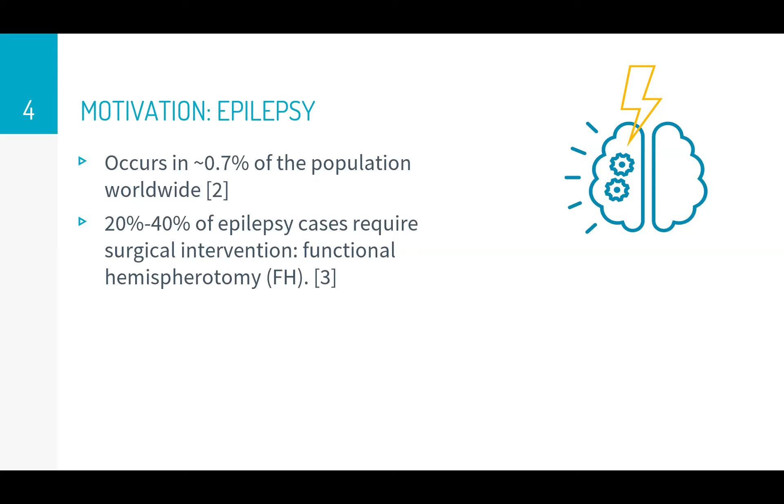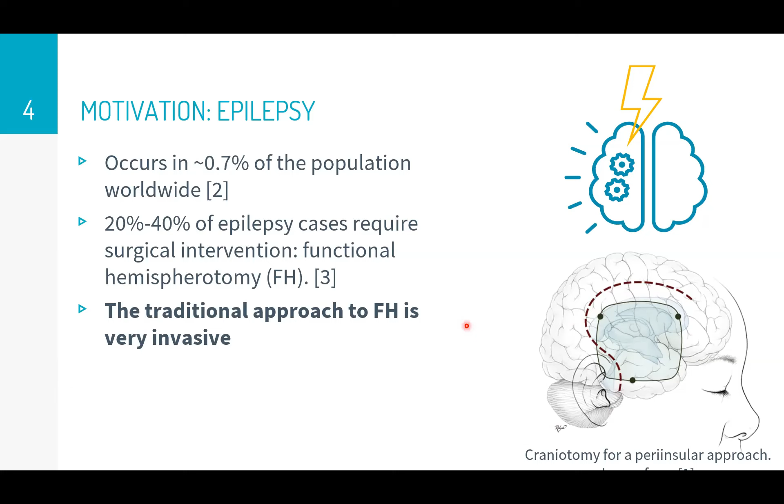The reason why it's so invasive is that this FH procedure involves the disconnection of the two halves of the brain, so you have to cut the brain in a lot of different places. It's somewhat illustrated on the right here. This isn't actually what it would look like when it's done, but this is sort of an exaggerated view, an artist's rendering, to show you where the disconnections are happening in the brain. You have to do quite a few cuts over a large volume within the brain. It's quite a complex procedure, and that's why it has a relatively high level of invasiveness.

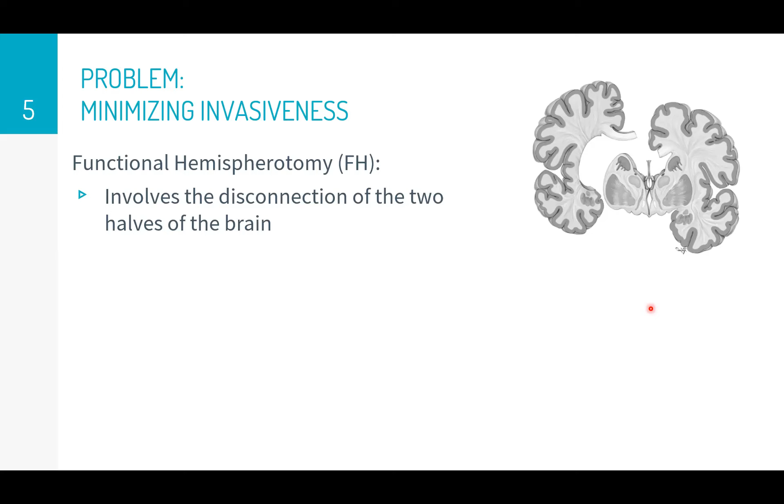Further complicating this problem is that the patients are often young children, less than 5 years old. The reason for that is that these procedures are more effective generally the younger the patient is. It tends to be safer and result in less seizure recurrence after the procedure for younger people, and improved outcomes cognitively as well. Because of this, there can sometimes be cases where the patients have multiple comorbidities, or additional complications. This was one case that was taken from a paper that I was reading a while back.

And to try to reduce the invasiveness of the procedure, instead of cutting that large window, they did the procedure with lasers. With that, they were able to only burr several holes in the patient's skull, but it was still quite invasive. And you can see that this is a very young child that they're performing this procedure on.

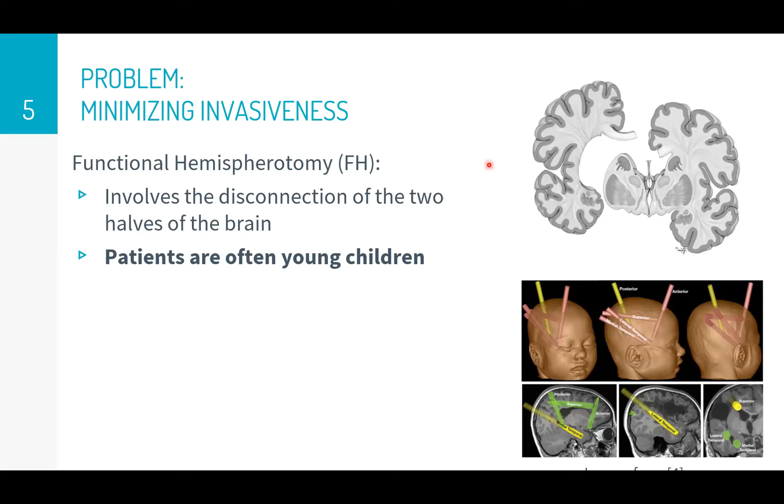So we want to minimize the invasiveness, because generally speaking, less invasive procedures are safer. They require less time for patients to recover afterwards. So if we want to do that, a minimally invasive approach is going to need a few things.

It's going to need distal force sensing, so sensing at the tip. Some methods of hemostasis, which is dealing with potential bleeds. And most importantly for this presentation is smaller, more maneuverable tools than what currently exists. I think that really those tools have to be robot tools for the kind of maneuverability that we're looking for.

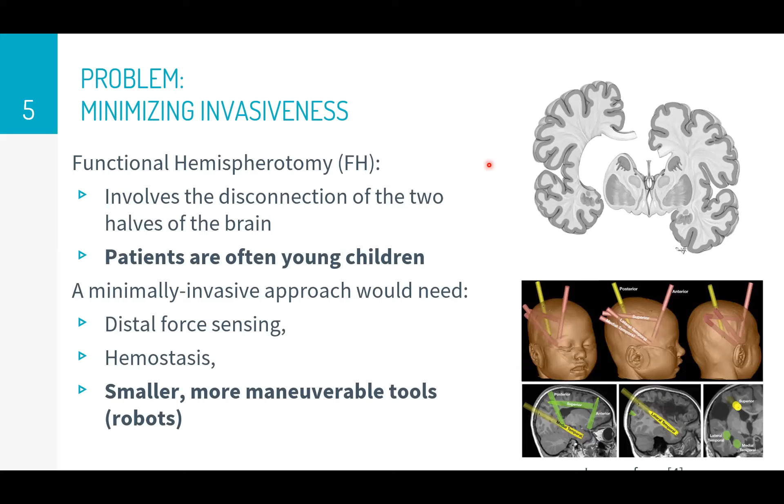So when we look at existing actuation methods for surgical tools, the most common one, which is in use right now, is cable pulley systems like the DaVinci robot. That's a very common surgical robot that exists right now. I have an image of their tools on the right here, and you can see that there are these wires that wind around pulleys. By pulling on these cables, you actuate the tool by pulling on the cables around the pulleys.

And it has some disadvantages associated with it. I won't get into all the details on that.

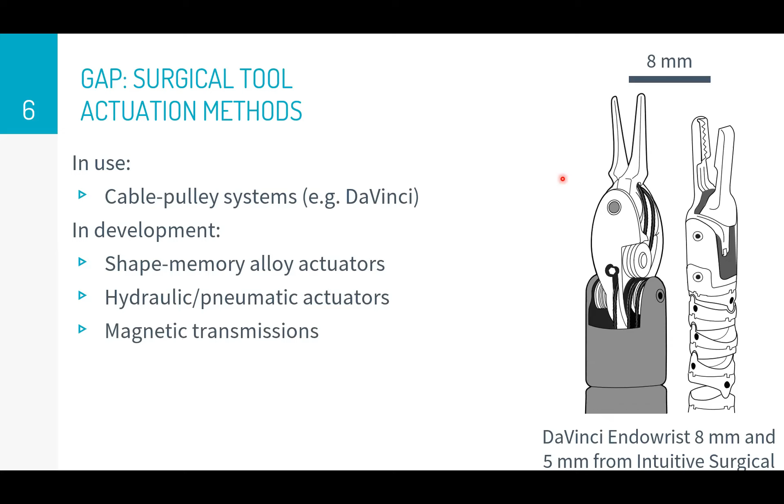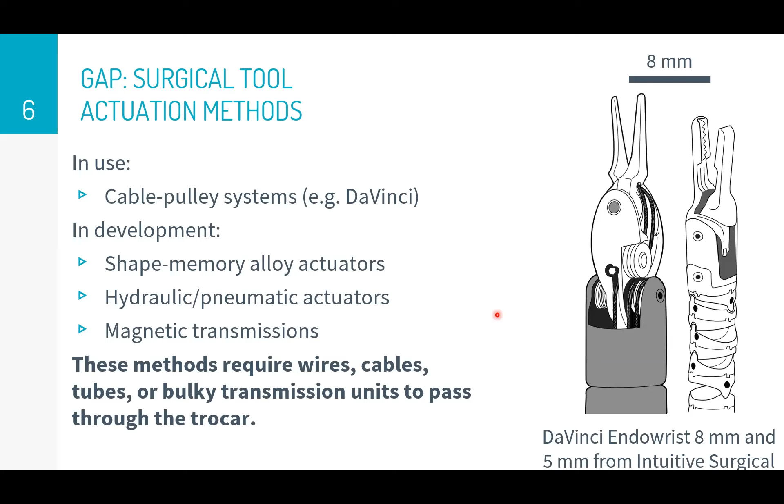There are other potential actuation methods in development. Some groups are working on shape memory alloy actuators, hydraulic, pneumatic actuators, these magnetic transmissions. But what all of these actuation methods have in common is that they require wires, cables, tubes, or some kind of bulky transmission unit to pass through the trocar, which is the entry to the patient. So we want to keep that entry as small as possible.

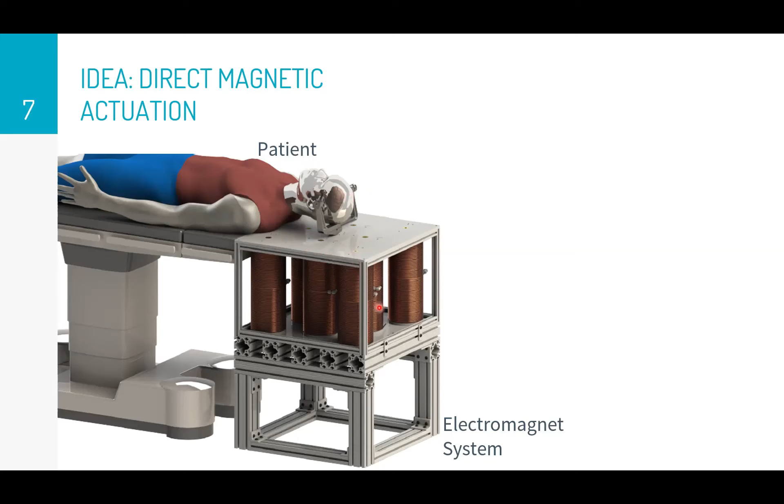And what this would look like is you'd have a patient lying on a table, and underneath the table, you would have a system of electromagnets that project a low frequency magnetic field into the surgical workspace. Then within the patient's skull, you would maneuver some sort of wristed tool. So you'd have maybe a concentric tube arm or some sort of robot arm that maneuvers its way into the skull.

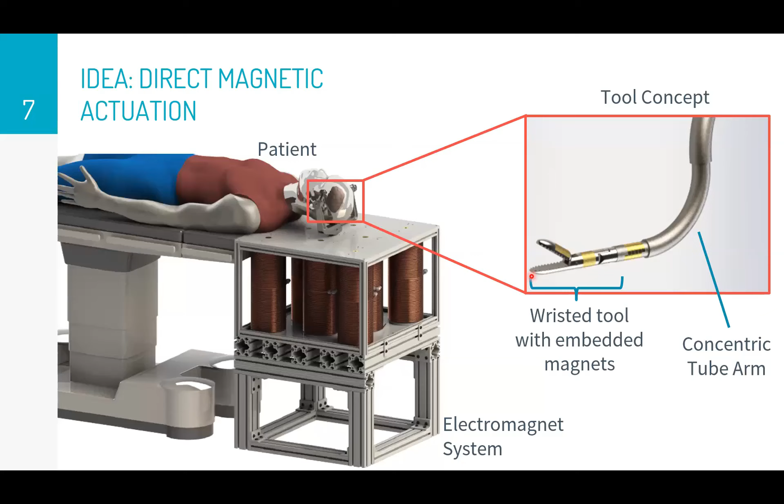And then it would have this wristed tool at the end. The tool would have embedded magnets inside. Those magnets would respond to the magnetic field so that we can use the magnetic field to control the configuration of the tool. That's the basic idea behind our approach. And so that would look something like this.

And what's particularly unique about this approach is that because it's wireless transmission of forces to the robot, we don't need to run signal lines or any sort of mechanical transmission to the tools. So that saves a lot of room for other systems.

And you can see with this robot concept that there are in a surgical robot a lot of different systems that need to be included in the robot, such as lighting, vision, irrigation. Irrigation means you have some cleaning solution, like a saline solution, because surgery can get messy and you need to clean things off to see properly.

You would have some arms for maneuvering the tools, maybe sensors for determining collisions. So with all of those systems needed for a successful robot, you don't really have much room left for transmission lines for the tools themselves. So we're going to take away the transmission lines and do wireless tools. That's the idea behind our system.

We did develop some previous tool designs, and these were really neat. But they didn't look much like surgical tools. They were a little bit flimsy. We actually made them by welding together nitinol, which is a nickel titanium alloy, with different wires and parts. I won't get into all the details, but it was a previous work that a previous master's student did in our lab.

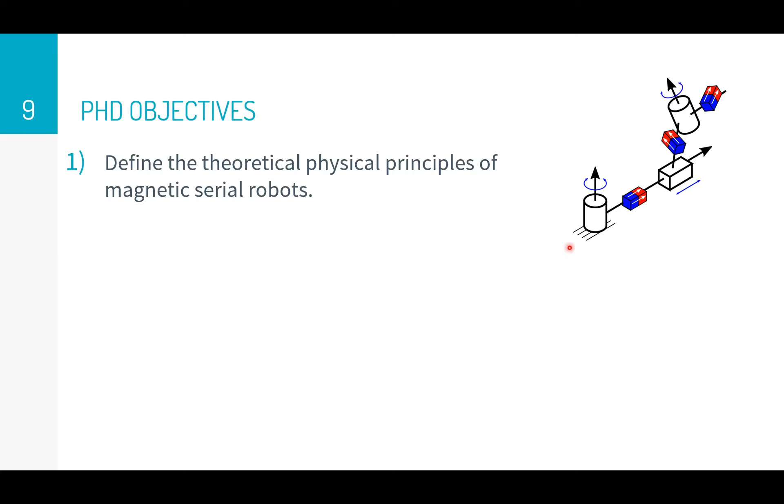So that would be about creating this theoretical interpretation, a model of the devices. And then the second objective is to go from the model to a real tool design, to evaluate the feasibility of this approach, these magnetic serial robots, for our intended application, which is minimally invasive neurosurgery. And we came up with some basic design criteria for that.

The tools would need to fit through a 2mm diameter hole, because ideally this endoscope would be no larger than 10 millimeters, so we could have a very small burr hole to enter into the patient's skull. It would be at least 100 millinewtons of force, which we determined reading literature on the kinds of forces exerted during neurosurgery. And it would have to be some sort of articulated wrist. It can't just be a straight wrist that just has an opening and closing tool. It needs to have some articulation to it.

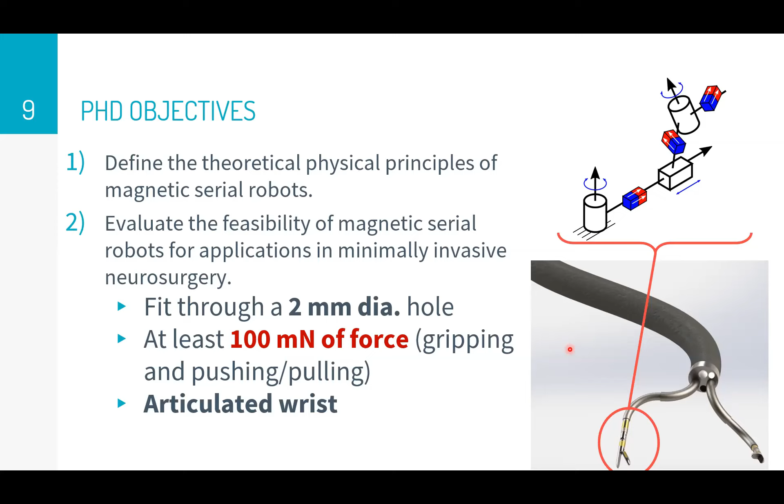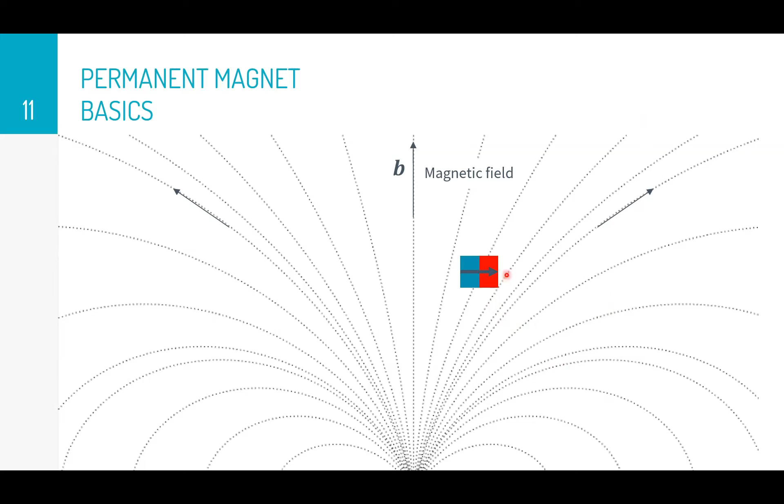So we have some field projected into the workspace, and in that field we have some permanent magnet. We can make some assumptions that allow us to represent that magnet as a single vector quantity, which we call a magnetic dipole, M. The energy of this system is negative M dot B, the dot product between M and B. As you understand, for any physical system, it's going to tend to try to minimize its energy. It's going to have some energy gradients that cause forces and torques on the system to try to bring the system to its minimum energy state.

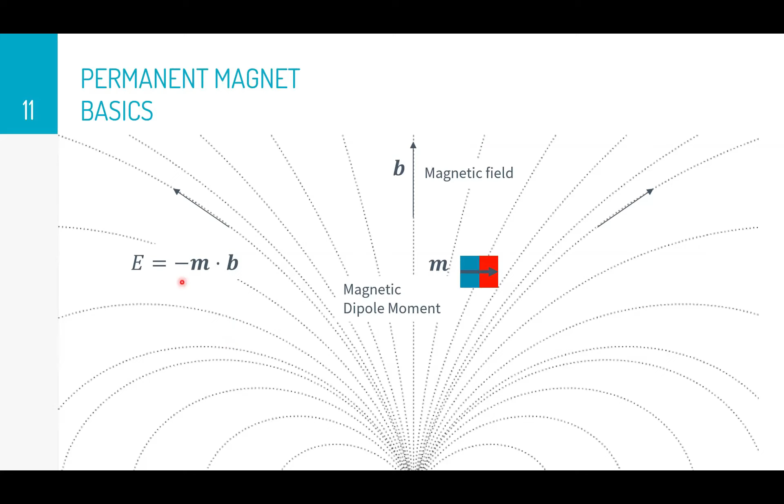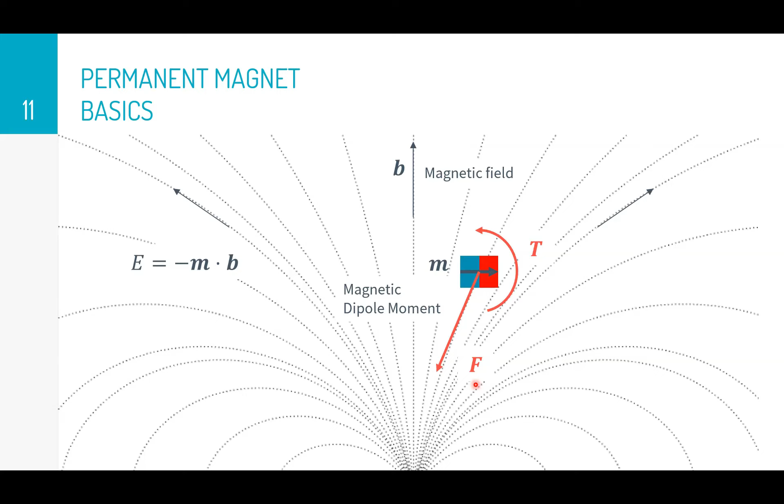So what that means is that because we have this negative here, it's actually maximizing the dot product. And the dot product is maximized when the torque causes our magnet to align with the direction of the field, so that M and B are parallel, and a force that draws M towards regions of higher B, because the larger B is, the lower the energy of the system. So if we can control the magnetic field, both the shape of the field, where it's dense and where it's more open, and also the direction of the field at a given point, then we can control the torque and force on the magnet and use that to do more complicated maneuvers with magnets. This is something that's been done in small-scale robots for decades now, but this is a new application and a new scale that we're looking at.

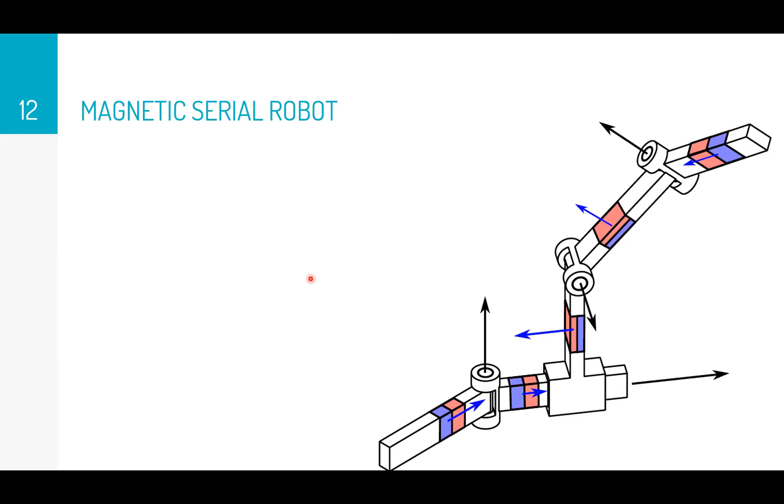So let's take that idea and apply it to something a bit more complicated. This is a concept rendering of a magnetic serial robot, which is a serial mechanism, and maybe it has some revolving joints, some sliding joints. In this particular example, it has 4 links plus a base link that might be connected to ground or some other object. We can use standard conventions in robotics to define the axis of motion of each of those joints, usually indicated by a K hat or Z hat, depending on what you prefer. So each of these joints is going to have some joint axis.

And then each of those axes is going to have what is called a generalized coordinate associated with it. So for a revolving joint, that generalized coordinate is going to be an angle, theta. For a sliding joint, that would be a joint position, D. And this is all standard for any serial robot.

What's new for this particular kind of robot is that in each link, we have some embedded magnetic material that could have some orientation in the link. It's fixed, but some designed orientation. And those magnets, there's going to be one in each link.

And that is how we control the robot. So unlike in a conventional robot where there would be a motor at each joint, we have these magnets instead. We need to figure out, there's two questions. One is, if we're given a robot like this, and we know the orientations of all the magnets, how do we apply a torque to each of those joints to get the configuration that we want? That's one question you can ask.

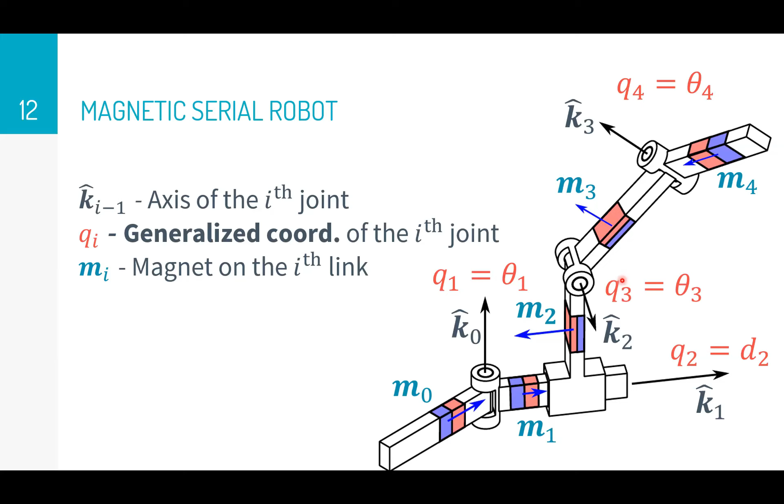And then the harder question is, given some kinematic skeleton of a robot, what should the orientations of the magnets be to have the best design that can be fully actuated and apply the most force? What's the optimal design, or even just what is a good design for that robot? And that's what I'm trying to answer with my PhD.

So in order to do that, we need a dynamic model. And when you're doing a dynamic model, at the end of the day, you're doing sum of forces equals mass times acceleration. But because of the nature of a serial robot, we often reformulate this in a different sense. We write this H inertia matrix times the second rate of change of our configuration, Q, with respect to time. So Q is just a vector of all of those generalized coordinates.

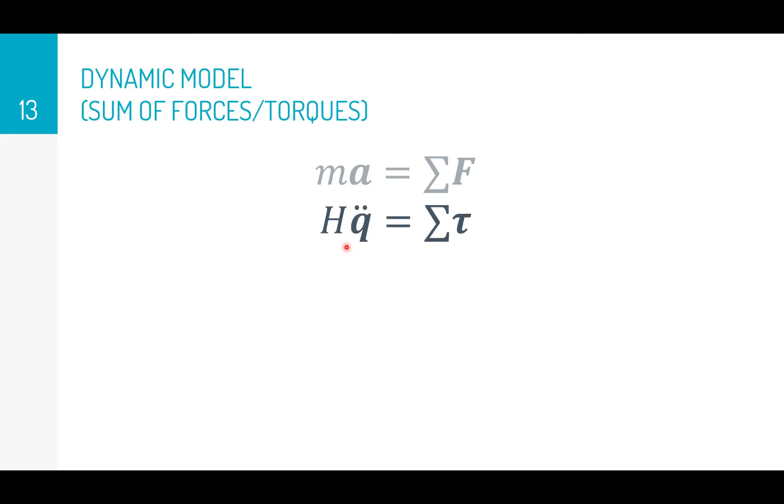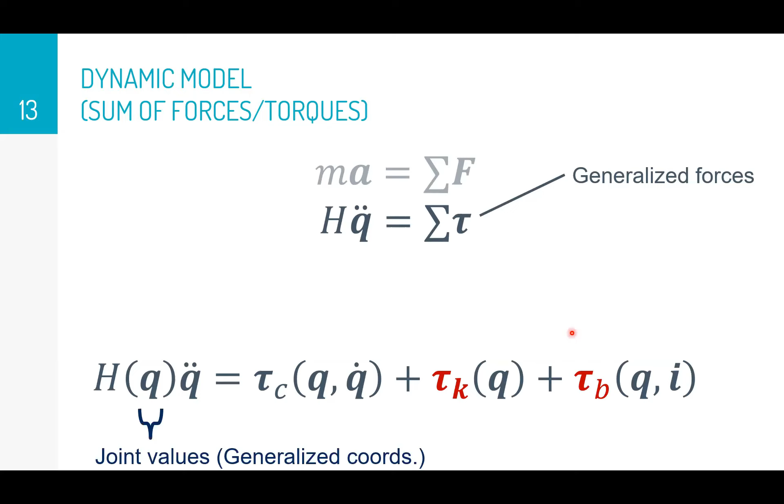That's going to be equal to the sum of the generalized forces. Much like how the generalized coordinates could be both rotations and translations, generalized forces can be either torques or forces. So we can assemble that into one big equation. This is pretty standard for a serial robot to have an equation that looks something like this, where we have our joint values, our generalized coordinates in the vector Q.

We have our joint space inertia matrix on one side. We have all the generalized forces that are functions of both the configuration and the rate of change of the configuration. So those would be things like friction, Coriolis, and centrifugal forces. Now, I know those are fictitious forces you might recognize from first-year physics, but because we're dealing with a non-inertial reference frame, we have to include the fictitious forces in our dynamic model.

And then we have those generalized forces that are only functions of the configuration of the robot, so the current position of the robot links, such as gravity or joint stiffness. And I've highlighted joint stiffness in red here. These two are highlighted in red because this is where the magnets come in. The rest of this is standard robot stuff. Where the magnets come in are on these last two terms.

And the joint stiffness is highlighted because you can imagine that not only are these magnets affected by the field that we've projected into a workspace using our coils, but they're also going to be exerting forces and torques on one another because two magnets near to one another will attract or repel. So that is going to cause this sort of stiffness behavior in the robot. I wrote another paper on that I won't be talking about in detail today, but if you have more questions, you can ask me and we can discuss that a little bit.

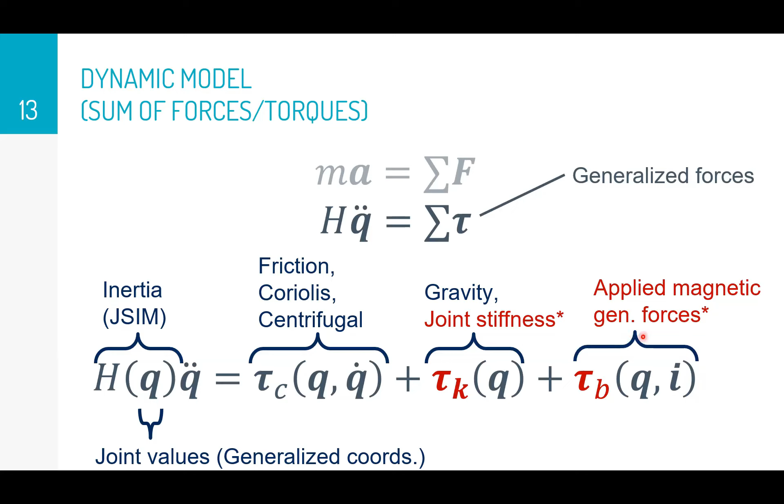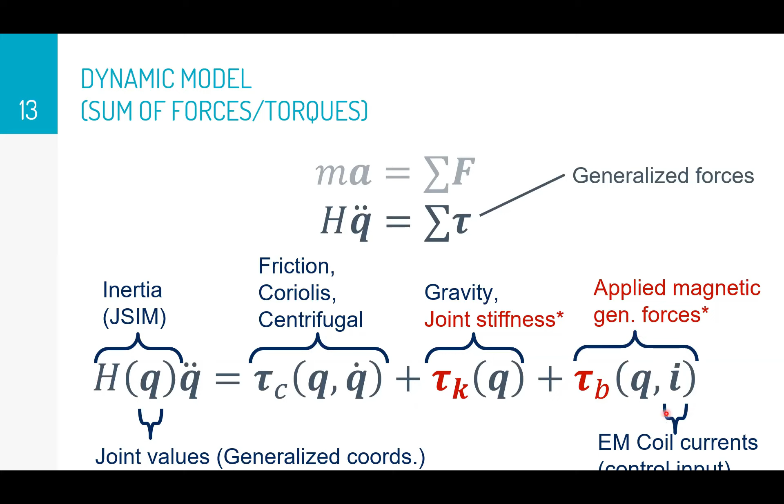Today, I'm really going to be focusing on this last term, which is the applied magnetic generalized forces, tau B. And that is a function of both the current robot state, or the current configuration, and also the coil currents, the electromagnetic coil currents that we're applying. And this is our control input. So you'll notice that all these other forces are simply functions of our robot state. And then this force here, this is where our control comes in.

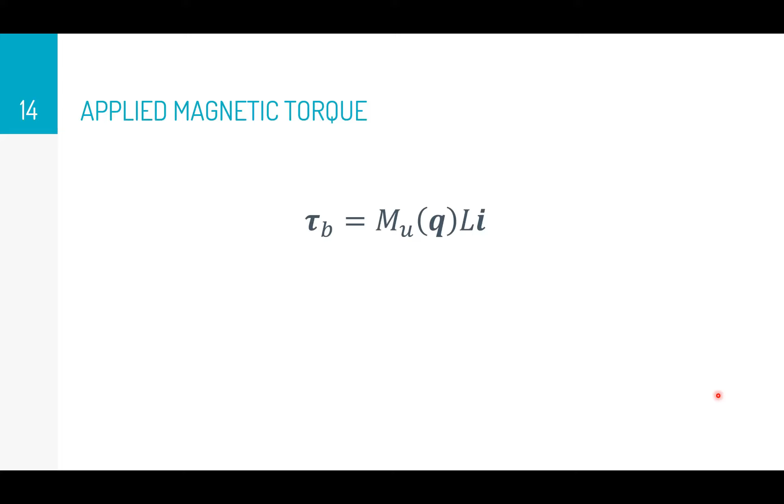So if we take a closer look at that, I haven't given you the derivation because it's long and complicated, but let's just look at the result and you'll have to trust me that this is right. Part of my thesis was deriving this, where we have the coil currents on one side, we have the generalized forces, these applied generalized forces on the other. It's a relatively simple expression. You can see that it's linear with respect to the coil currents, which means that our rate of change of our state is affine with respect to the currents. So we can see here that there are two components here that are relevant.

There's a magnetization matrix M_u, which is a function of our current configuration. What that means is that as the robot reorients itself in space, the orientation of its magnets is changing because the link orientations are changing. So if the magnets are in a new orientation or position, we have to think about how that affects what field we need to apply to our robot. That's what's encapsulated in this magnetization matrix: how the orientation of the magnets changes as the robot moves.

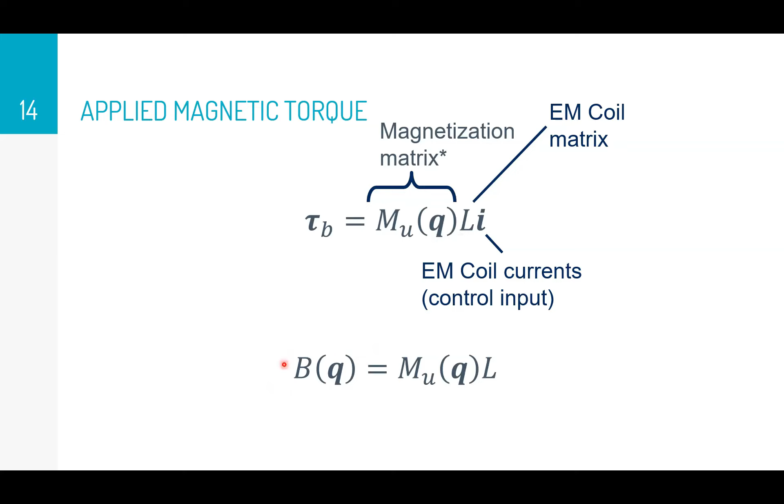The other important component is this electromagnetic coil matrix, which is usually a constant for each coil design. If we take those two matrices, we can clump them together into a single matrix called B. By analyzing this matrix, we can draw some conclusions about the nature of our robot and how we go about designing it.

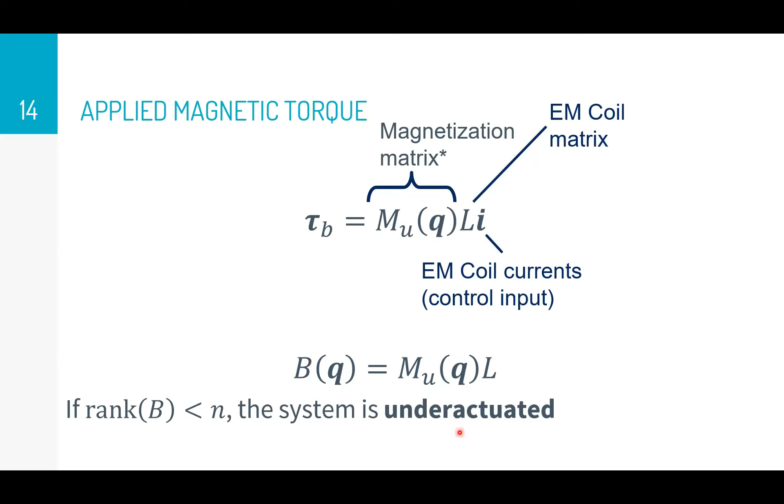One critical conclusion we need to draw is that if the rank of B is less than n, where n is the number of joints or links in our robot, then the system is going to be under-actuated. Our robot is under-actuated. That's a technical term in robotics. So what is under-actuation, and why is it a problem?

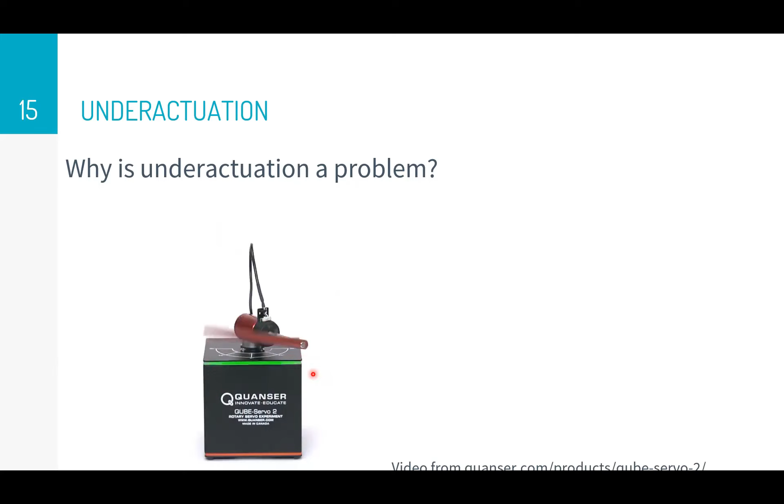The way it works is that you have a single link. This center link has a motor that can rotate it left and right. Your second link, which is the pendulum, is completely unactuated—there's no actuator associated with it. It just hangs limply. The interesting thing about this kind of robot is that it is controllable in a technical sense, but it is under-actuated because one of the links does not have an applied actuator.

What that means is that if we want to achieve certain states with that hanging pendulum, we need to leverage the dynamics, and that leveraging is this sort of swinging motion you can see here, where it has to swing to bring the pendulum up into the vertical position.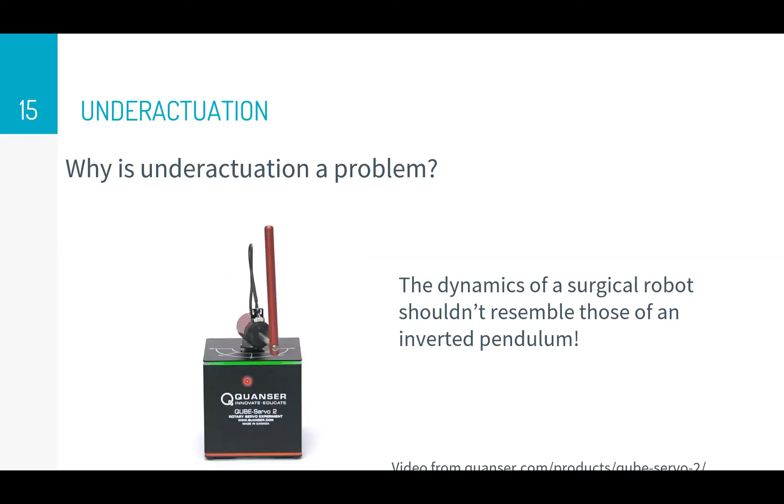I would propose that the dynamics of a surgical robot shouldn't resemble the dynamics of an inverted pendulum. If the doctor says, move the tool to here, we don't want it to have to swing to get there. We want a smooth, controllable motion from point to point, not leveraging the dynamics of the robot to do that. That's why for our systems, we want to make sure our robots are fully actuated. So we can dig a bit more into this full actuation concept.

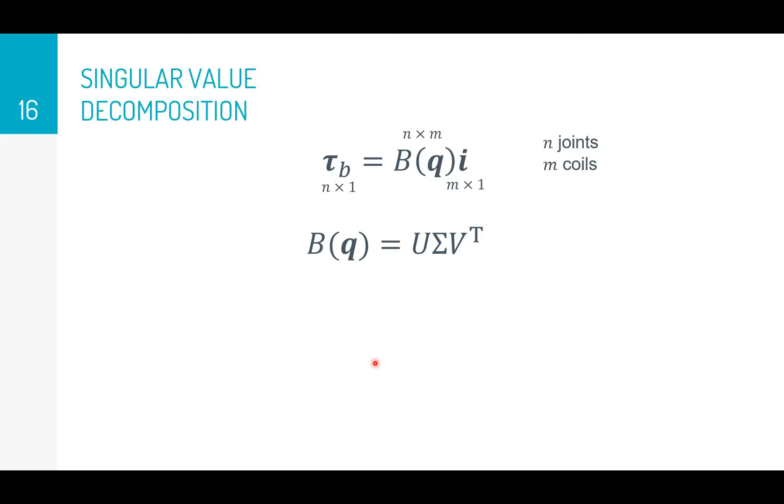If we look at this expression again, we have the applied generalized forces on the left, our coil currents on the right, and this B matrix. We can use something called singular value decomposition to split up that matrix. Every matrix can be represented as a rotation, a scaling, and a rotation.

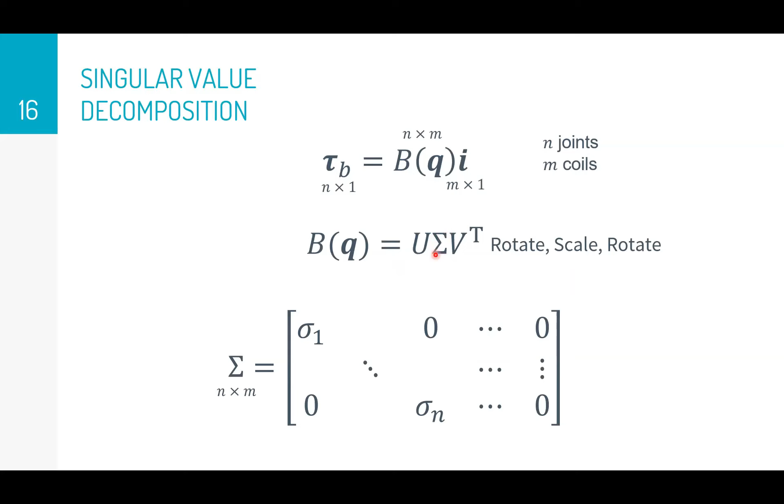The scaling is really the important part I'd like to focus on. That scaling matrix, capital sigma, is a diagonal matrix with lowercase sigma values on the diagonal. The top left is usually the largest of those values, called the largest singular value, and the one in the bottom right is the smallest singular value. The smallest singular value is related to the rank of the matrix.

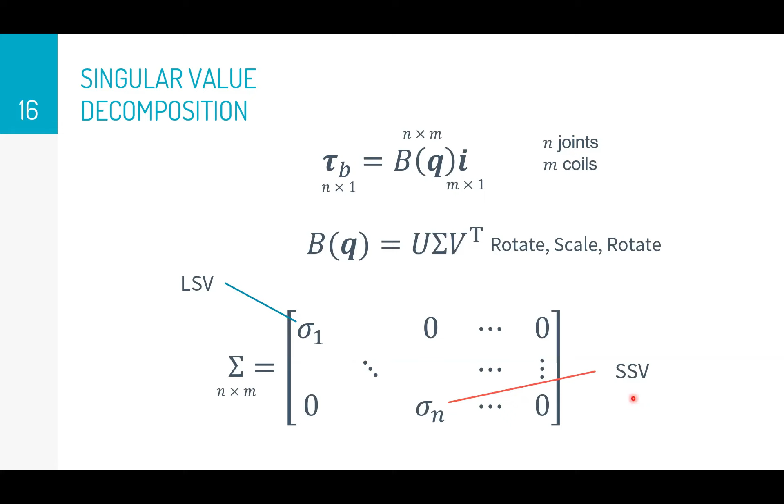If that small singular value is 0, then we've lost full rank. And if it's very small, our matrix is very poorly conditioned, so it's effectively lost rank. Generally speaking, we can use that to draw conclusions about what we want our B matrix to look like based on this smallest singular value.

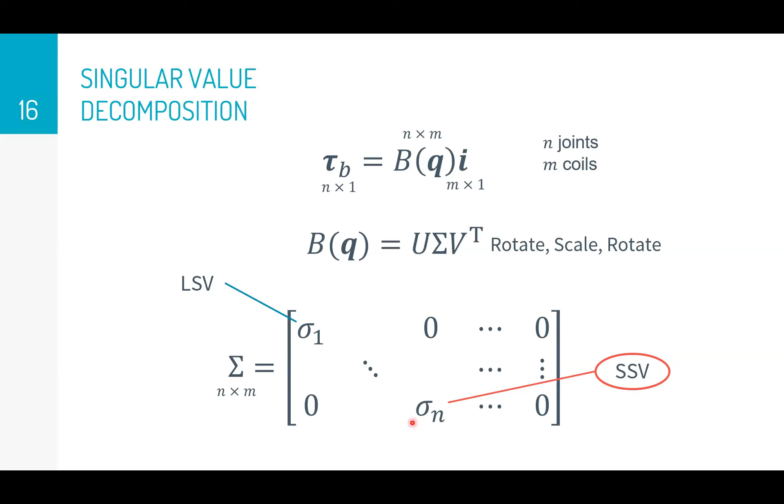The takeaway from this dynamic model is that if sigma n, our smallest singular value, is very small, then the system is going to have poor actuation performance. It's going to have low strength, and it's potentially going to be under-actuated or effectively under-actuated.

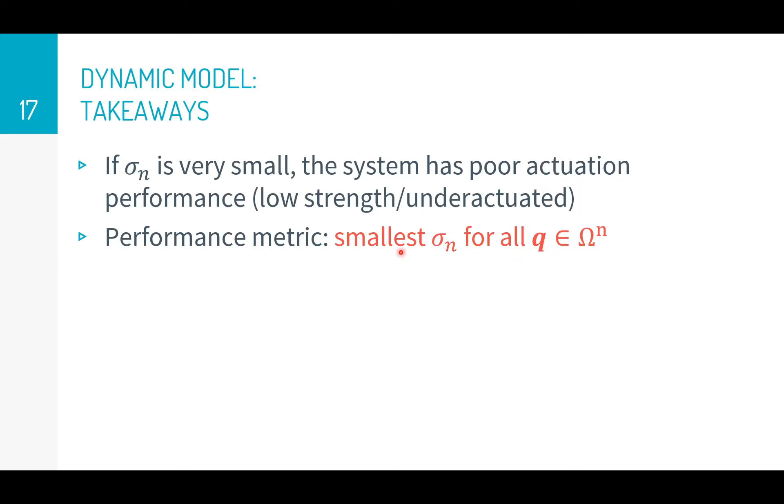So we can use that to define a performance metric—perhaps you could use that for optimization. I haven't done that yet, but it's certainly something you could do: taking the smallest of the smallest singular values across all configurations that a robot can have.

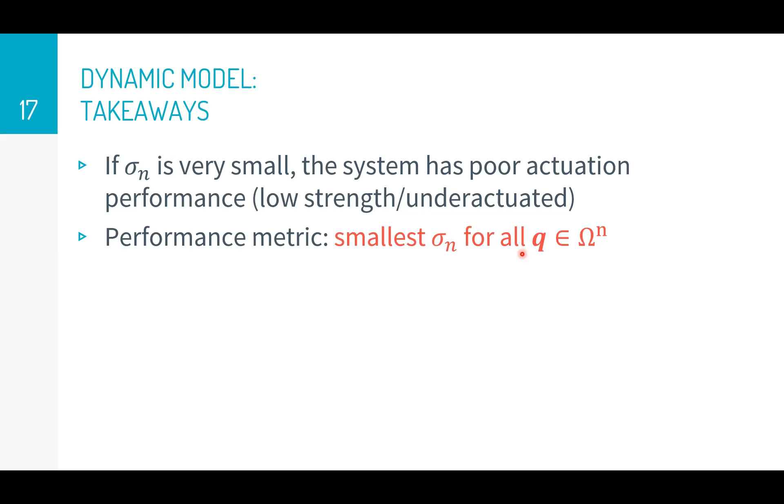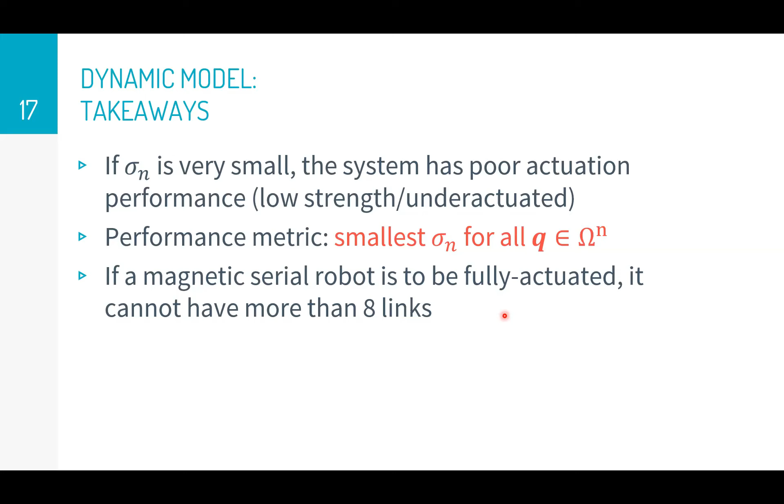Remember, that B matrix changes as our configuration changes. So if a magnetic serial robot is to be fully actuated—that's a separate conclusion I won't dwell on right now since I'm running short on time. But this is really the main takeaway: we want to maximize that smallest singular value. So what does that look like for the design?

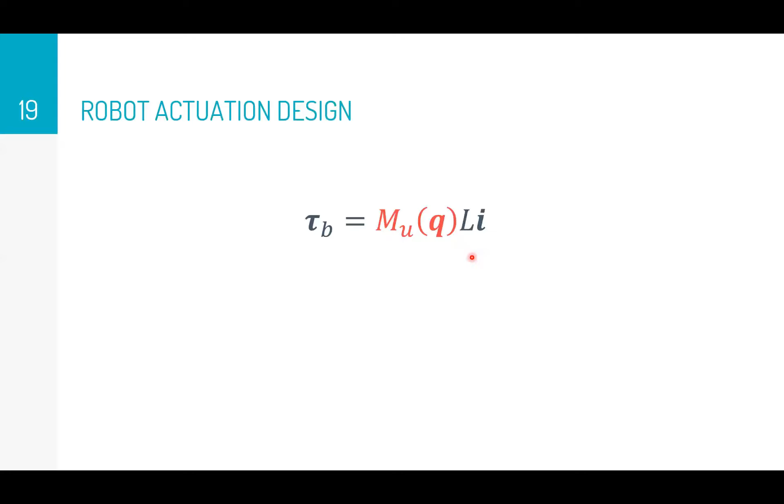Here is our robot actuation design. We have the applied generalized forces on the left, we have our coil currents on the right, and remember, these are the two components of that B matrix: the magnetization matrix M, and the coil matrix L.

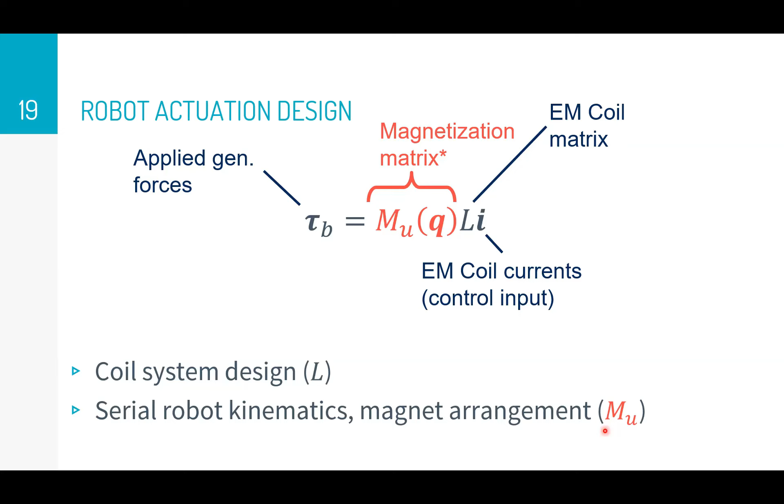The coil matrix is based purely on the coil system design. It's independent of that serial robot end effector. It's important for the end effector, but the L matrix is independent of it. Then we have the serial robot kinematics and the magnet arrangement, and that's what determines MU—the geometry of our robot and where the magnets are placed within the links. That is really the focus of my work.

So my L matrix is fixed—I don't get to choose it. It's based on what he designed for me, and thankfully it's a very good L matrix, which helps with my work. So the focus of my work is on that MU matrix and ensuring that it's properly conditioned.

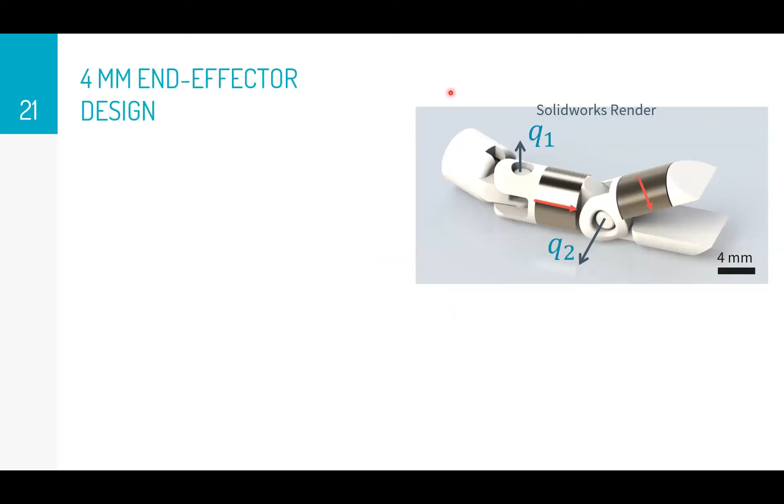With that, I developed a Matlab model. I put together some designs in SolidWorks, and using the Matlab model with the robotics toolbox, I was able to estimate what the smallest singular value is going to be. I came up with this particular design, which happened to have the smallest singular value of 27 micronewton meters per amp.

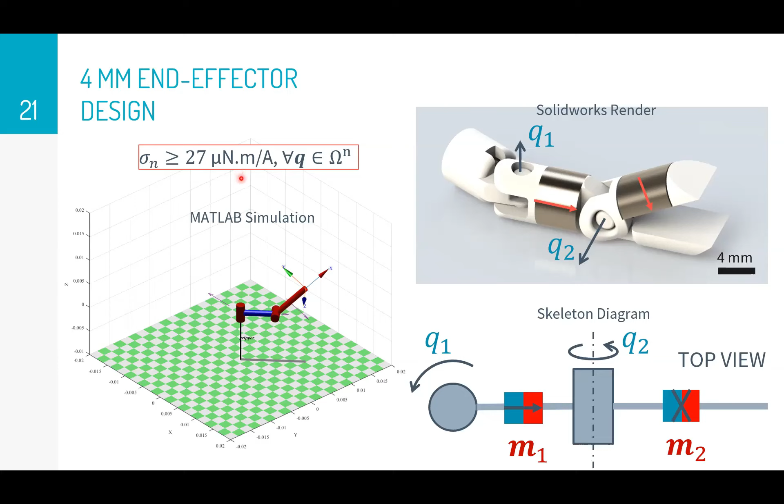That's a little abstract, so I've put together some more intelligible specs here. The dimensions of the robot are 4 millimeters in diameter compared to the Da Vinci's 5 millimeter diameter for their smallest tools. It has a length of about 20 millimeters, a compactness of 6.6 millimeters—which is the measure from one joint to the other—compared to the Da Vinci, whose larger tool has a 9 millimeter compactness and smaller tool has a 19 millimeter compactness.

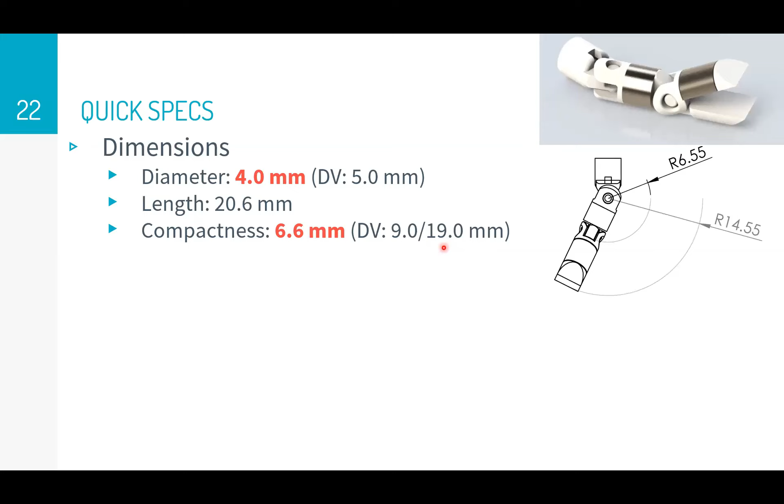They found that in order to make their tools smaller with these cable-driven mechanisms, they had to increase the turning radius quite significantly—more than double it. So ours has both a small size and a small turning radius, which I think is a pretty good result.

In terms of output forces, this is related to that smallest singular value. The larger the singular values are, the more output force and better actuation performance we get. I have a predicted minimum gripping force of 88 millinewtons and a maximum grip force of 180 millinewtons, so our maximum force greatly exceeds our target gripping force of 100 millinewtons, which you might remember from the start.

Now, the only problem is that our gripping force is proportional to the characteristic length squared. So if we take this robot design and scale it down by a constant factor in all dimensions—say by a factor of 2, since our target diameter was 2 millimeters versus this design's 4 millimeter diameter—we'd be scaling our forces down by a factor of 4. That would put us below our target gripping force. So chances are a 2 millimeter robot with this type of direct magnetic actuation is just not going to work, which is okay.

We're coming up with other means of doing such small tools. But for now, we have pretty small tools—smaller than the state of the art in terms of robot tools. So we're pretty hopeful about these.

Another unique aspect about this design is I designed it with sensor integration in mind, and it has this hollow core in the middle—just a hole running down the center. So the idea is that you could run wires, like for sensors, down this hole. This is something you can't do with other actuation types, because that inner space is usually filled with the transmission mechanisms needed to move the robot. So that's a unique aspect of this design.

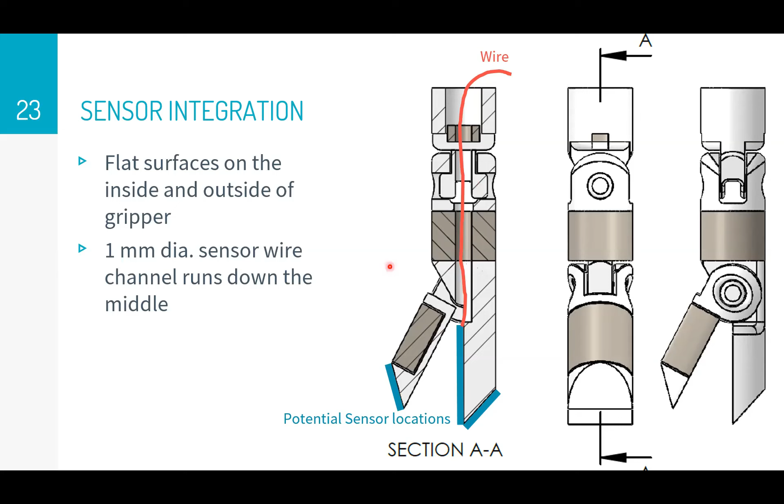That about covers the work I've done so far. I'm going to talk a little about summary and future work. First, to summarize, the whole motivation behind our work is tool miniaturization. We need smaller tools if we want to advance minimally invasive approaches to neurosurgery, and that will make surgery safer for people, especially for smaller patients like children.

Our idea was to use direct magnetic actuation to do this, which is wireless, so we can eliminate the need for a transmission mechanism, which makes more room for other components and functionality in the robots.

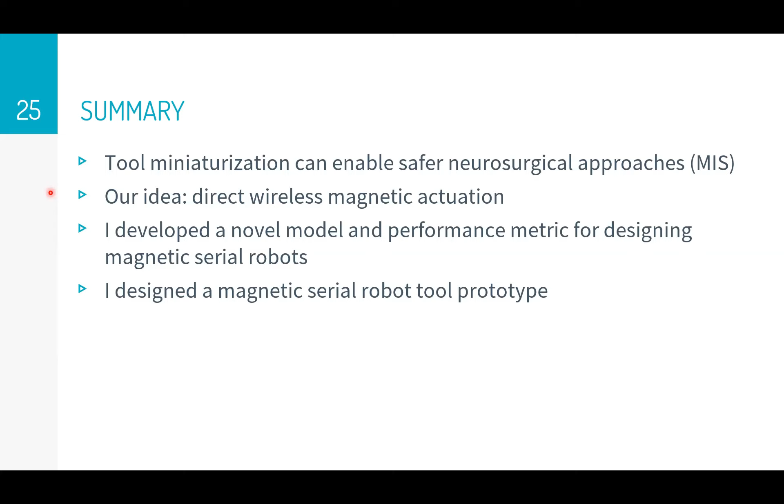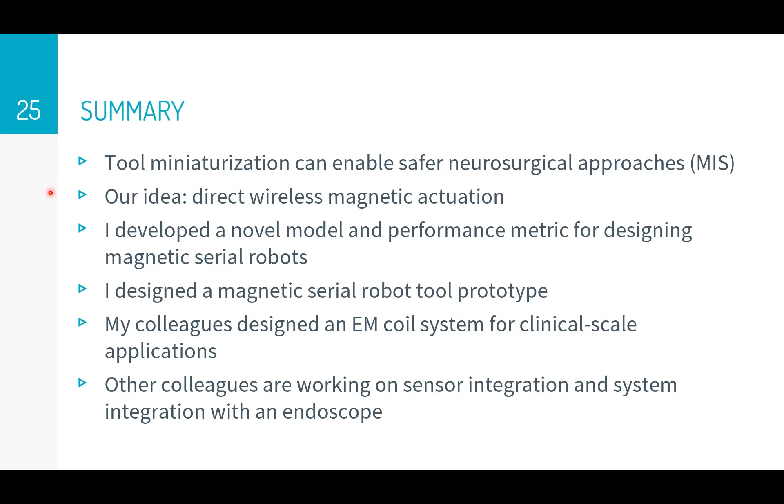I personally developed a novel model and performance metric for designing these robots, and I'm working on developing some novel designs right now. I've designed a serial robot prototype, and they're currently printed, and we're waiting on the next steps, which I'll talk about in a moment. My colleagues also designed a coil system for clinical scale applications, and others are working on sensor integration and system integration with an endoscope robot.

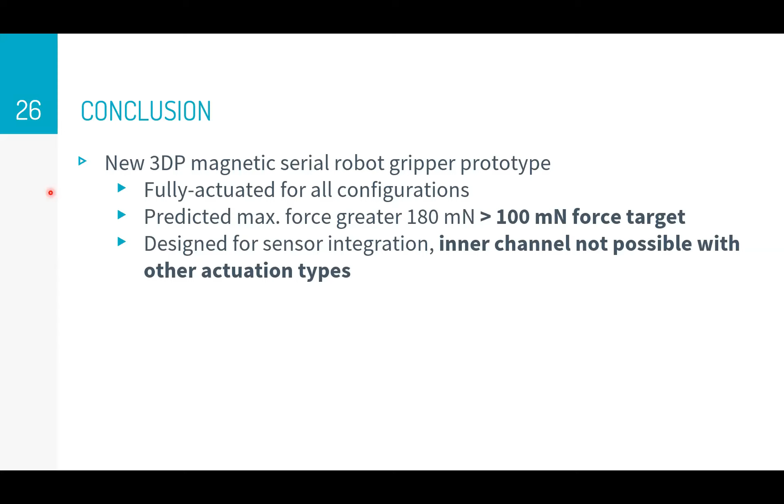So the conclusions so far for my work are that I've developed a new robot prototype. It's fully actuated for all configurations, which is very important—so it's not under-actuated. It has a predicted maximum force greater than our force target. It was designed with sensor integration in mind, which is a unique property, and it has that inner hollow channel, which isn't possible with other actuation types.

It has a 4mm diameter, 6.55mm compactness, which, depending on how you measure it, is 1.3 to 2 times smaller than existing Da Vinci EndoWrist tools, which are kind of the state of the art in robotic surgery right now, but they are larger than our 2mm target.

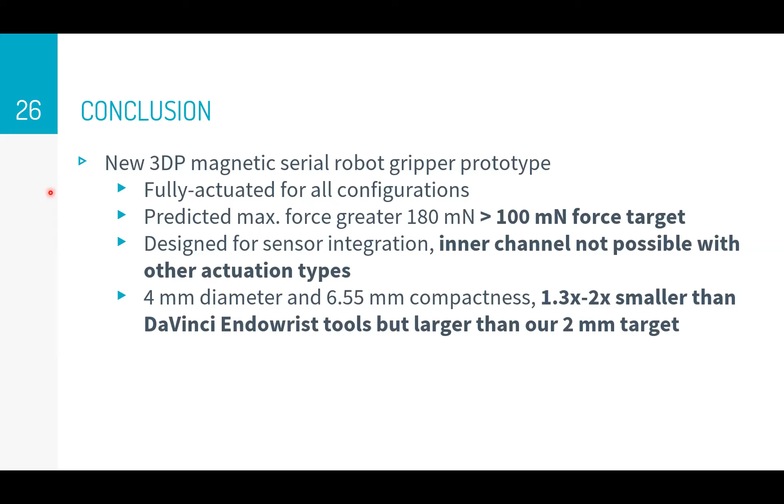In terms of future work, I have the control theory figured out, but it's a matter of implementing open loop control with these tools to confirm predicted forces and demonstrate full actuation. We also want to do closed loop control, which is important for tool safety in a real application.

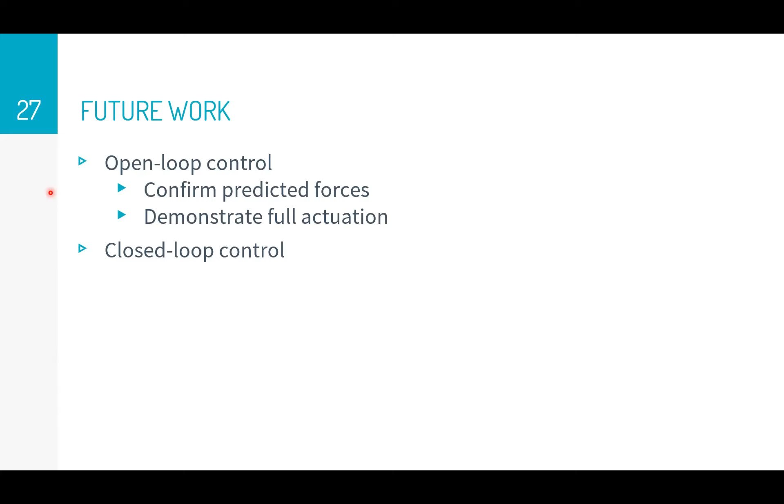For now, we're going to work on a simple case with two orthogonal cameras with computer vision feedback, but realistically for future applications, we need to develop systems that work on the harder case where we'd have a single endoscope for computer vision feedback.

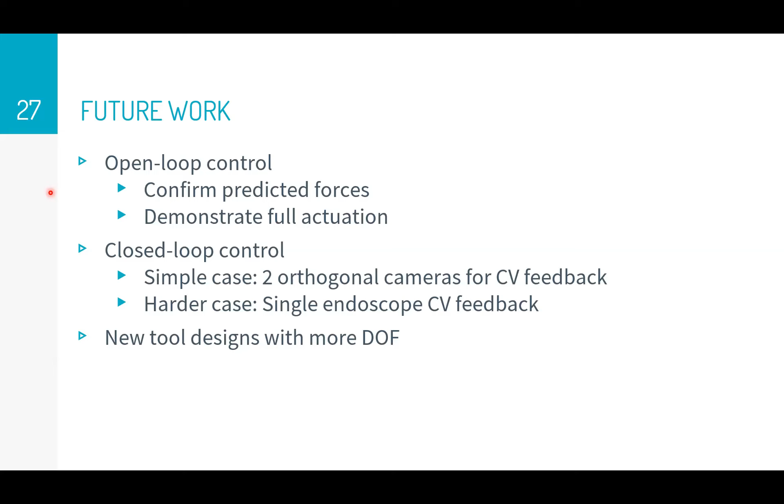I'm also working on new tool designs with more degrees of freedom. Right now it's just a single actuation for the wrist and opening and closing of the fingers, but we'd like more articulation on that wrist. We're also working on integrating the robot with the CTR concentric tube robot to do a surgical task demo.

Something I'd like to qualify all this work with is that I'm an applied scientist—that's really what I consider myself, a roboticist and applied scientist. But there's a lot of critical engineering work that might not be very publishable that needs to be done before anything like this can actually be used in a real surgical application.

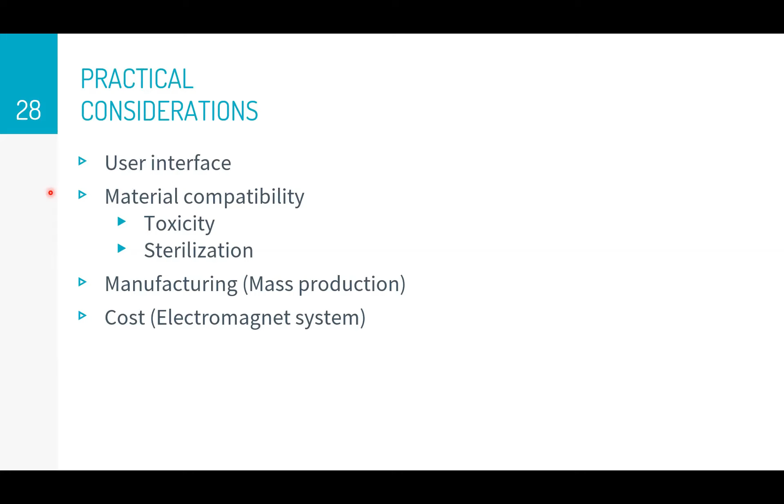The user interface needs to be designed. We need to look into material compatibility like toxicity and sterilization, manufacturing it for mass production, and reducing the cost of the system—the electromagnets are incredibly expensive. And designing these tools for functionality: I'm not a surgeon, I don't know the difference between DeBakey forceps and Cadiere forceps. So we need integration with surgical tool developers and all this sort of stuff, which might not really be publishable work.

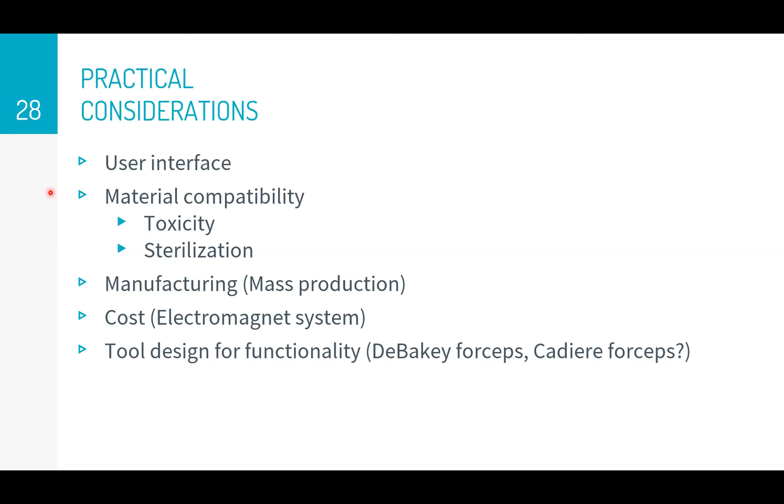And maybe some of it we will do in our lab, but I think, for example, animal trials and clinical trials—that is publishable, and that will eventually be done.

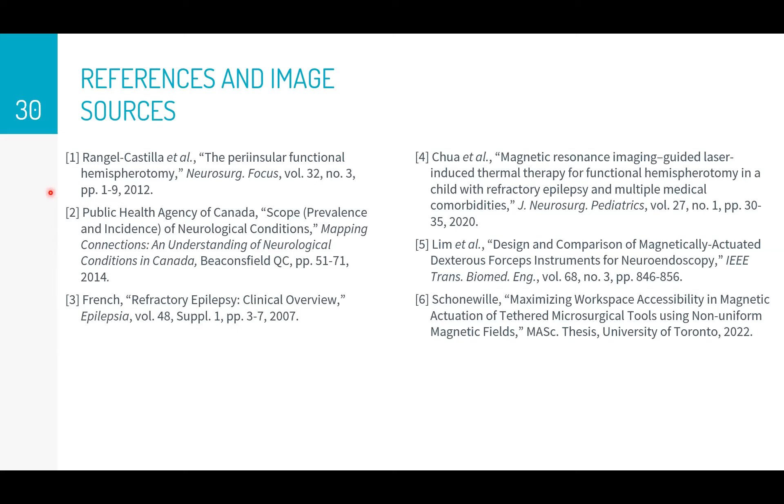Okay, Cameron, nice talk. I like the application and also that you use CTCRs, or concentric tube continuum robots. Do we have some questions from the audience?

So you mentioned with the B matrix, you can compute the singular values, and you try to maximize the smallest singular value, right? What is the maximum you can achieve? Is there an upper bound? If you relate the largest and smallest one with a factor, what's the maximum factor, if it goes between 0 and 1? If it's 1, it's theoretically possible to have 100%, meaning your largest and smallest singular value could be equal. That is possible, but I think it's unlikely.

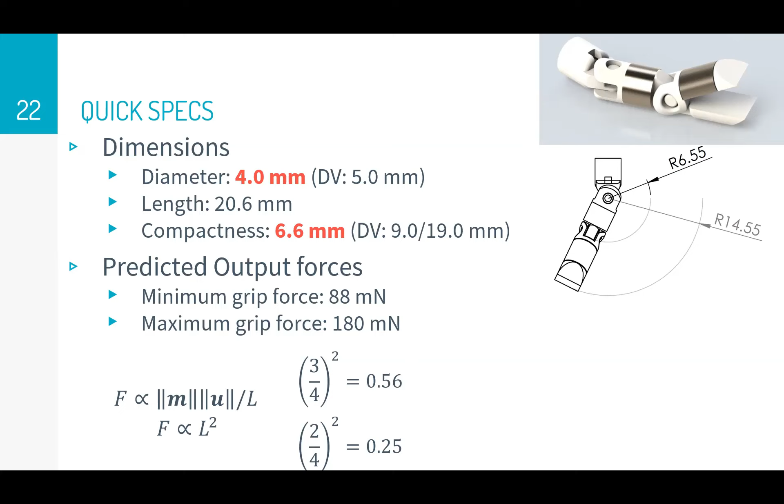Another question - have you got any real world video for your robot, or is it still in development and you're working on theory?

So I have an older video here of a previous design. It's a little shaky because we didn't have the closed loop working on it, and we had two side views. This is a smaller design - it was actually 3 millimeters that we were working on before. This was from the paper I briefly mentioned on the magnetic springs - you get this spring effect between the magnets. That was the focus of that work. Here's what that looks like.

Great. Yeah, thanks. I have a question. Cameron, thank you very much for your excellent presentation. A lot of innovation on board.

I'm wondering, how far do you think we are from using magnetic actuation in a real operating room with surgeons?

Yeah, that's a very good question. Because as I'm sure you're aware, since we work in the same field, there are already some catheter guiding magnetic devices where you have a catheter that is steered by magnetic fields. So it is being used already, but not for surgery.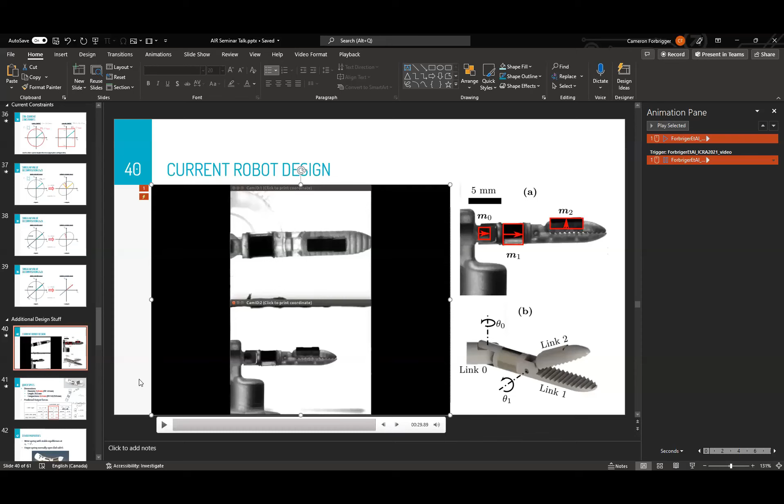So if it took me about 3 years to develop the theory and a first prototype, I feel like we're looking at a much longer time still for dealing with the problems I brought up in this practical consideration slide.

I think before this can be used safely for a real patient, all of these things, and probably some things I missed here, all need to be covered. And that's a lot of serious engineering.

And it's not necessarily engineering research, it's the kind of engineering that's more of a commercial kind that needs to be done. So at some point it has to exit the lab and enter the commercial space, where a startup or some company would put the finishing touches on this. I guess one thing I didn't even cover here was all the approval, like FDA approval and all that sort of stuff that you need.

So yeah, I'd say optimistic 10 years, pessimistic 20. But thank you for your question.

Thank you very much. I think that's expected with this new application for magnetic actuation. That is completely expected. Thank you so much.

We have more questions.

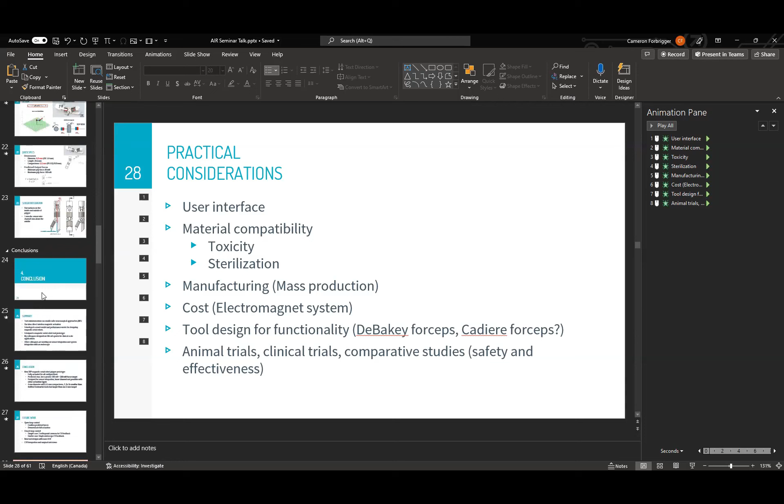Cameron, you mentioned that you derived the diameter cannot be smaller than 2 millimeters because it's too weak. I would suspect this is also because the magnets right now are permanent magnets, not electromagnets. What happens if you would substitute the neodymium magnets with a coil? Is this possible? Do you see any benefits?

Yeah, that's a good question. You're right, coils can be much stronger than permanent magnets. Permanent magnets, as you've mentioned, have an upper limit on their magnetization, so that puts an upper limit on the strength of the robots.

And so with this robot, I used N42 magnets, which is a grade of magnetization. You could up that to N52. It would need to be custom designed. You could maybe eke out a little bit more magnetic volume on the tools as well, filling in more parts, but you'd need custom magnet designs by a company to produce that.

But in terms of replacing the permanent magnetic material with electromagnets, that would definitely improve strength. But the question is, would the strength be better than simply putting in something like a shape memory alloy actuator, which has a really high strength but requires electricity to run it.

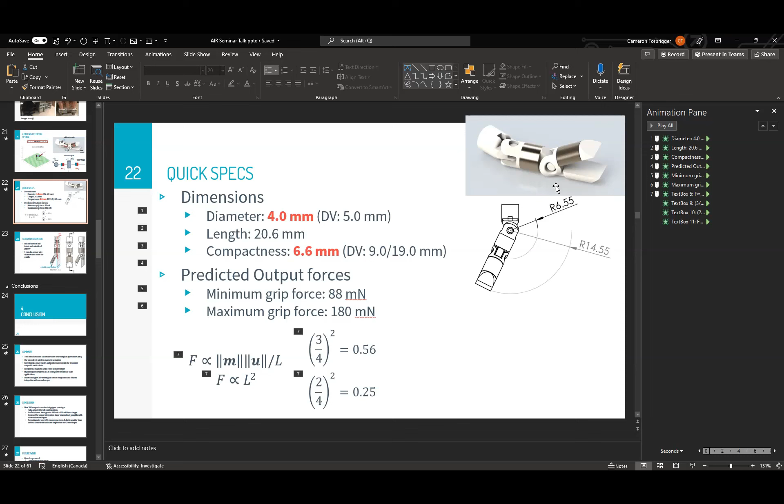Yeah, that's absolutely right. So it was a very interesting challenge. I was closely involved with Adam's work—Adam was our master's student who put together these coils. I'm familiar with a lot of it, and he spent a lot of time trying to design a good electromagnet.

It's really quite challenging because we're working with surgeons, specifically Jim Drake over at Sick Kids, and he was very clear that a surgeon doesn't want to be blocked from their patient—they want full access. Your task as a designer becomes far easier for the electromagnets if you're allowed to enclose the patient like an MRI machine and have a borehole. In that case, you can make your magnets quite a bit smaller, because magnetic field is like a flow, a flowing current. So if you can pull it from the top and push it from the bottom, it works a lot better than just having a bunch of things at the bottom trying to push it up through. That's kind of how I visualize how the field works.

Because we were limited to only being below the patient and not in the way of the surgeon, that meant we just had to produce as big magnets as we could. And the other tricky thing is the bigger you make them, the farther away they move, and your magnetic field scales with the fourth or fifth power of distance. So the farther away you put them, the bigger they have to be, but then the farther away you have to put them. It's an incredibly challenging design problem, and Adam did very well with it.